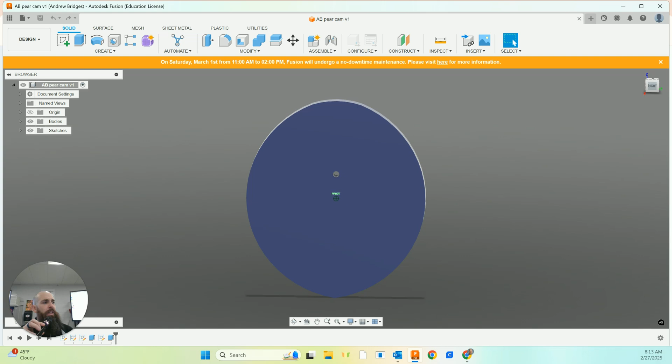The first way that we're going to produce these cams will be 3D printing, and we're going to take this custom cam that we made yesterday. It says pear shaped, but it looks more like an oval or maybe an eccentric cam. Either way, whatever the name says, we're gonna show how to turn that in. The format that we're gonna turn it in is called an STL format.

So it's very simple. Once you've got your model created, you're going to go up to File, then come down to Export. I'll turn on my mouse highlighter. So File, Export, and then on the export screen, you're going to give it a name. I would recommend starting it with your initials and even the bell. So 2AB pear cam.

Then what you have to do is change the file type from an F3D, which is a Fusion file, and scroll all the way down to STL. Take note that it's going into your downloads folder when it's done. So we'll click export.

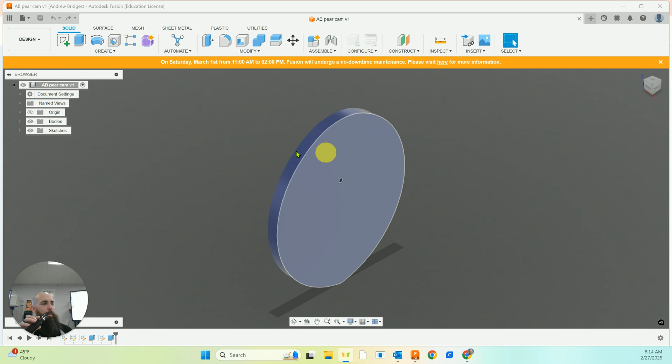It may or may not pop up with a window that says it's a cloud conversion. It did not pop up with that, so we're good. That file should now be in my downloads folder, and I can go to my file explorer down here and check.

So now I go to my downloads folder in my file browser and look to see. My computer's taking a minute. There it is — my 2AB pear cam — and it does say it is a stereolithography mesh, so that's an STL file.

Perfect. That's all you have to turn in to me on the Google Classroom for your first cam. Now I do want you to go ahead and slice that on the slicer and print that yourself. So to do that, I'll just go ahead and show you, so you're ready to turn it in.

Continue on by opening the slicer — I've got the Cura slicer, not Creality, sorry, the Cura slicer. I've got mine pinned to my taskbar. You could pin it if you want, but we can always find it by going to the search bar at the bottom and typing in Cura. Everybody should have it on their machine. We'll click to open UltiMaker Cura.

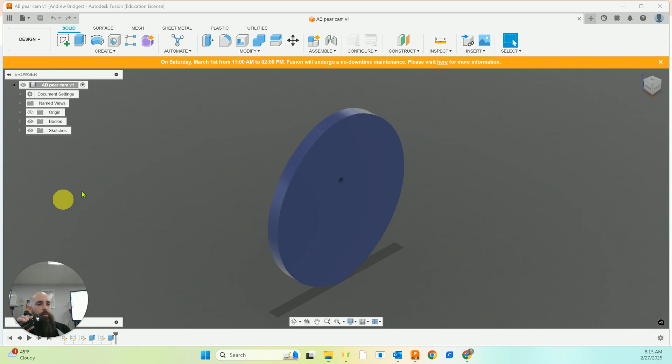I'm going to pause while my software loads. It's taken extra long today.

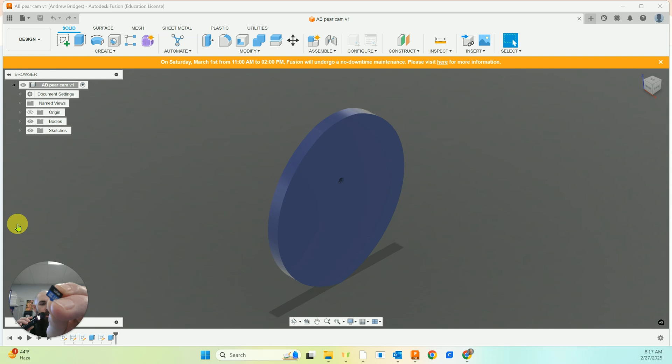Meanwhile, I've gone back to the back of the room where the 3D printers are, and I have ejected the micro SD card from the first printer I found that was not currently running. The way that you eject it is you click in on it and let it kind of pop out to you. Along with that, I went ahead and grabbed one of these SD card converters that goes into the USB port on your PC.

It looks like my software is now up and running. At this point, I'm going to go ahead and plug in my SD card reader, and I'm going to plug the SD card into the card reader, logo side up, so the metal pins should be on the bottom.

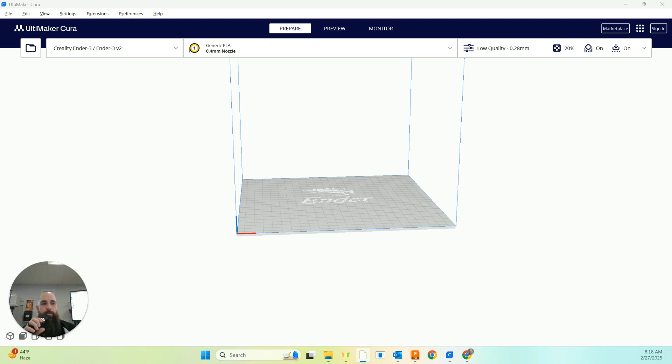Now, in my Cura software, I can go over here to open. Let me show my screen once again. The one thing I failed to mention was to set up our 3D printer profile. So if yours does not say Creality Ender 3, you would go right there to Add Printer and search for Creality Ender 3 / Ender 3 V2.

We can do that, but I don't need to since we have a non-Ultimaker, non-networked printer already set up. This is where we scroll down to find Creality — we expand the Creality 3D folder and find it down here, one of the longer names, Creality Ender 3 / 3v2. If you have not added that, go ahead and add it. Since I already have it, I'm going to click X here.

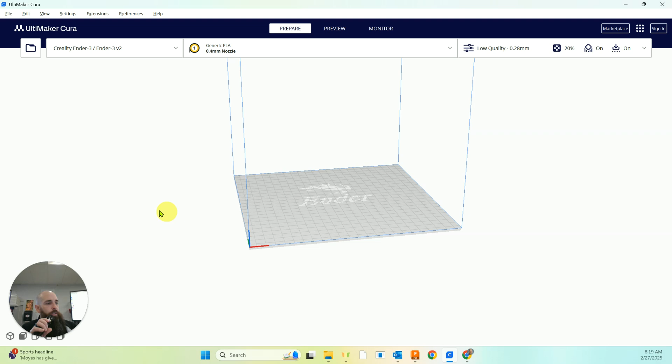So now at this point we can see the shape of our print bed, and we've got our STL file. Let's click the Open button up in the upper left corner, and we will go open our file — we'll retrieve it from the Downloads folder, which is where our STL file resides. And we'll say Open.

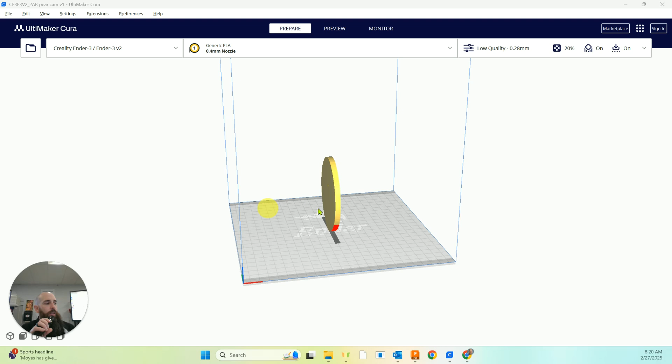So it puts it in the same orientation that I created it in Fusion, which is standing up. We could print it like that, but as you can see underneath, the red area means it's going to need some support there, and it's just going to take a lot longer. It makes a lot more sense if we lay this model down flat. You can't always do that, but in this case I think we can.

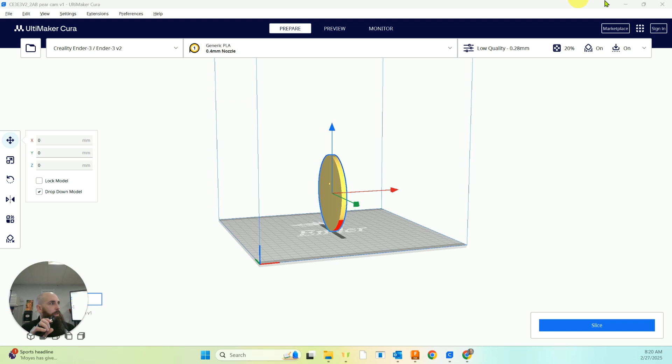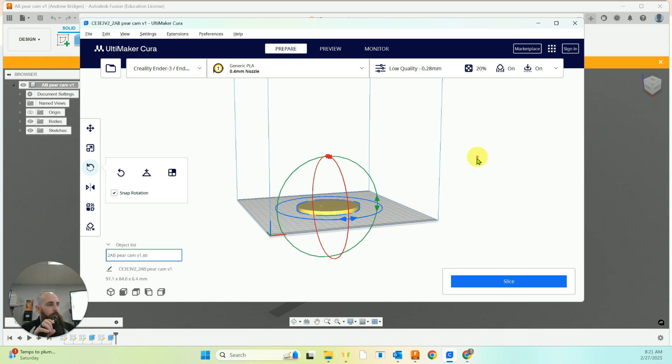So now I'm going to click on my model to select it, and then I'm going to come over here on my toolbar and I'm going to click on Rotate. And as you can see, I'm going to choose the green to rotate it in the, what is that? The X dimension? I'm not even sure at the moment. And there we have it.

If we click up here on the top right, this is all one button. You can click on that and you can change the infill settings. That's 20% infill. You could raise that or lower it, but I think 20 is fine. Honestly, we could probably get away with 10 to make it a faster print. So we'll click that, come down to infill, open infill, and we can make it 10%, I believe.

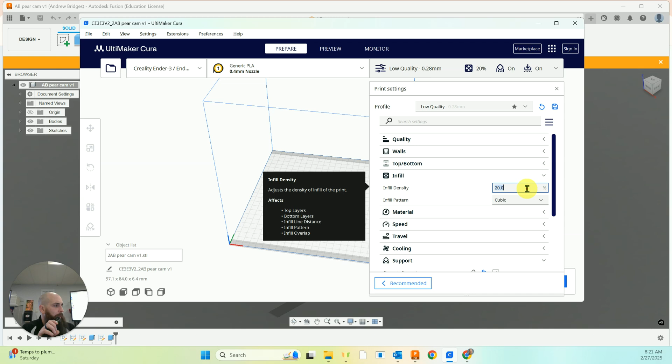Okay, the next thing it's looking for is support. We really don't need support, so we can uncheck it, but really there's no harm in having it checked. That's for if you have overhangs, and I'm a big fan of tree support, but once again, we shouldn't need it on this particular model. So it doesn't matter if it's checked or unchecked this time. It's a good habit to have it checked—it does not make support if it doesn't need it.

The last thing is adhesion, and that is, do you have any extra 3D print that helps it stick to the bed? I don't think anything is needed here. Sometimes on smaller prints you would need some adhesion, but in this case we don't need any.

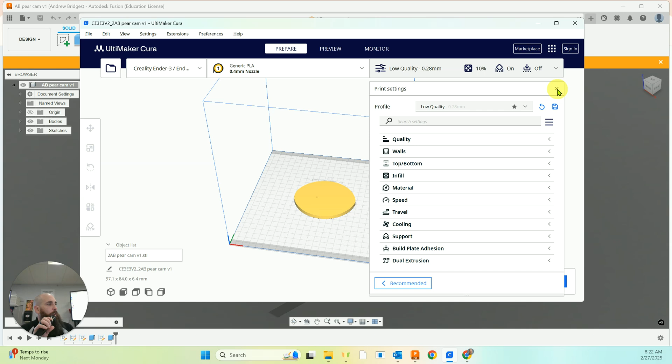So we changed the infill density to 10%. We changed the support to off or on—it doesn't matter. As long as you've got it laying down in this manner, then it shouldn't have to create any. And the adhesion we've got turned off. We've got low quality, which means a faster print, which is totally fine with us. We're not looking for anything life-changing here, and we'll click the X.

Now we're going to click the slice button. Make sure that your name over here with a little pencil—it automatically names it CE3E blah blah blah, that's just the name of the printer. If we erase that and just leave the name of your model in the beginning, that'd be great.

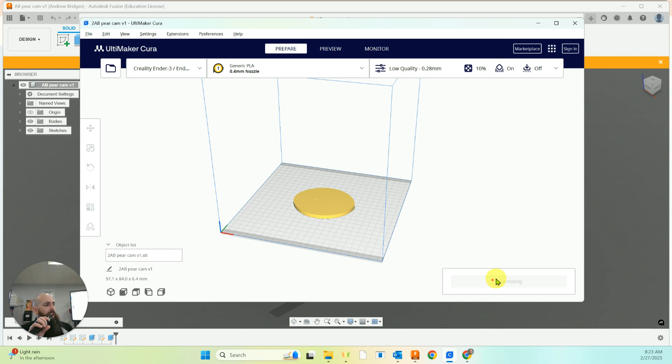And then it says we have a chance to save it to the removable drive, which is the SD card that we put in, so we'll go ahead and click that. It does save it to the removable drive. So we'll click eject, and now we can take our card out of our PC and take it over to the printer.

And when you insert it into the printer slot, you want to make sure that the metal tabs are facing up. It's weird, I know, but we'll click it in facing up. And then you click in on the knob and you select print and you select your file, and there you go—you're going to print.

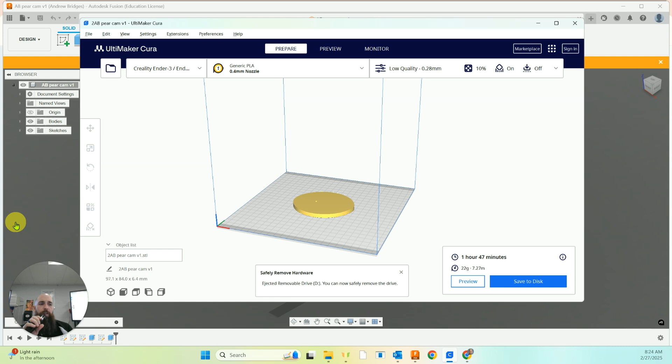That's the first way. That's everything that you need to 3D print your cam. I'm going to create another video next that shows how to do the laser cutting. Thanks for watching.